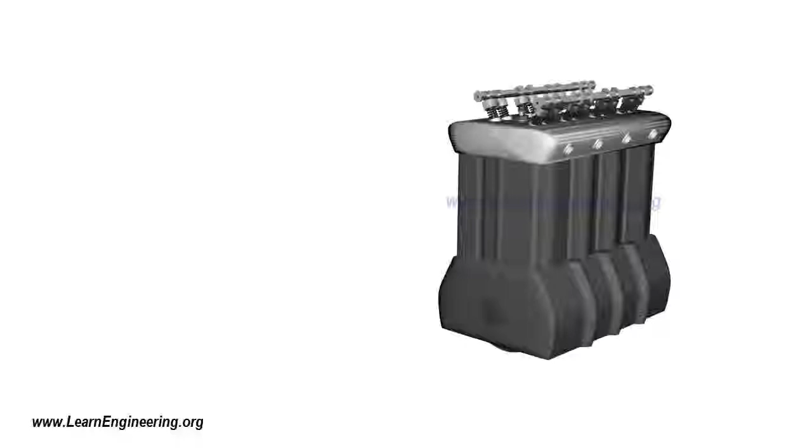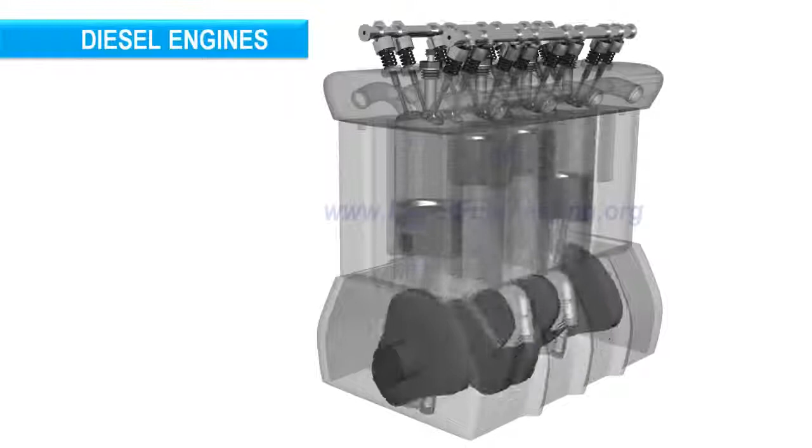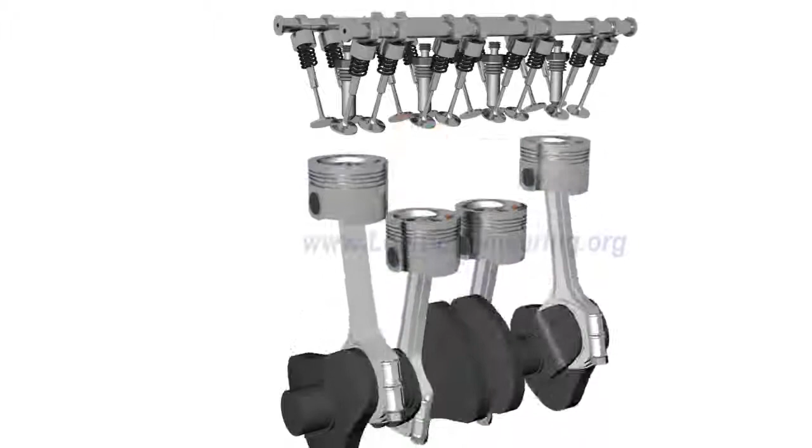An internal combustion engine transforms the chemical energy in fuel to mechanical energy. Diesel engines, which have been serving mankind for over a century, are the most versatile and economical IC engines. To release the chemical energy in diesel effectively, an atomized form of the fuel is made to contact with high temperature and high pressure air. This energy is effectively transferred as mechanical rotational energy.

So the operation of a diesel engine is all about producing high temperature and high pressure air continuously. We will see how this is achieved in this video.

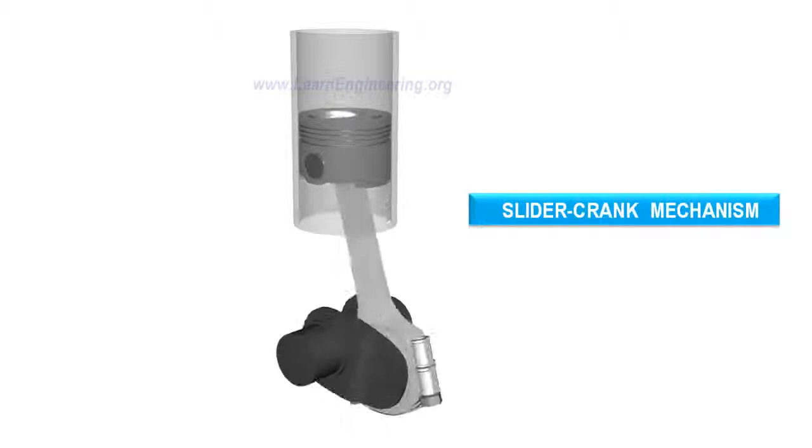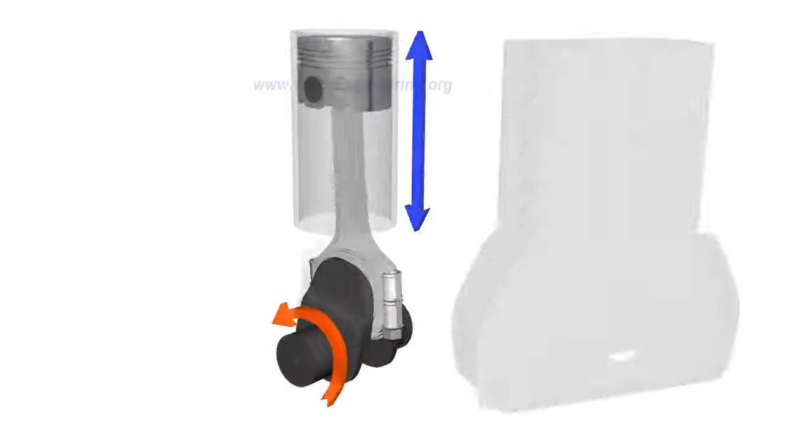Piston, connecting rod, crank, and cylinder form a mechanism called slider crank mechanism. Here, the linear motion of the piston is transformed to a rotary motion at the crank. In an IC engine, this mechanism is properly supported in an engine block.

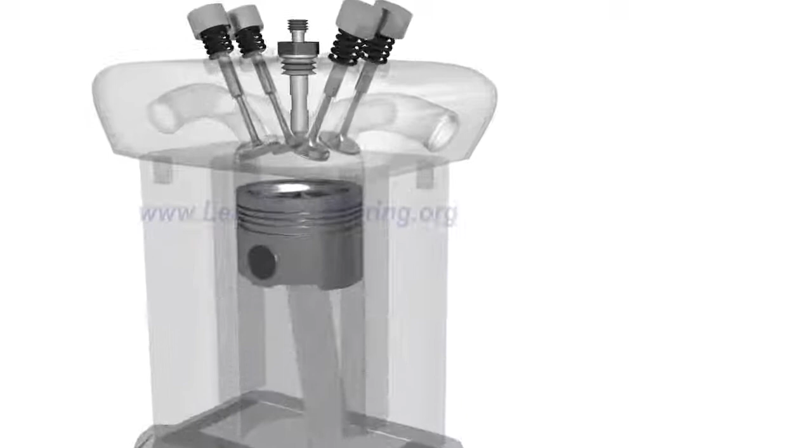Cylinder head, valves, and fuel injector are fitted above the engine block. When the piston moves downwards, inlet valves open and fresh air from outside is sucked in, or, in other words, the engine breathes.

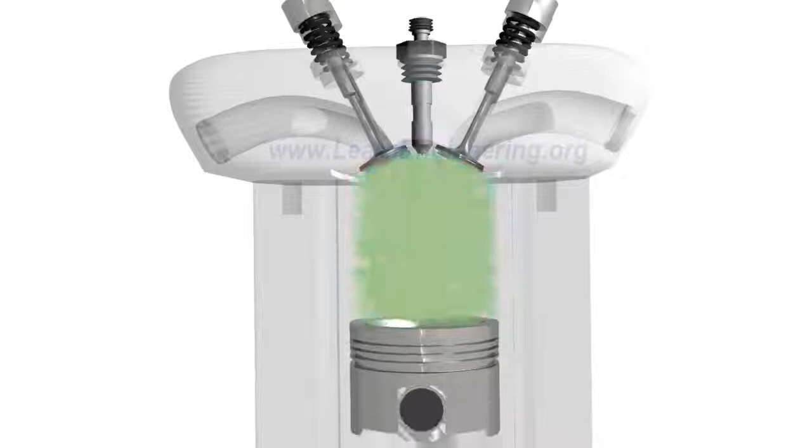During the return stroke, inlet and exhaust valves are closed, and the air inside the cylinder gets compressed. During the compression stroke, the piston does work on the air, so the temperature and pressure of the air will rise to a level which is higher than the self-ignition value of the diesel.

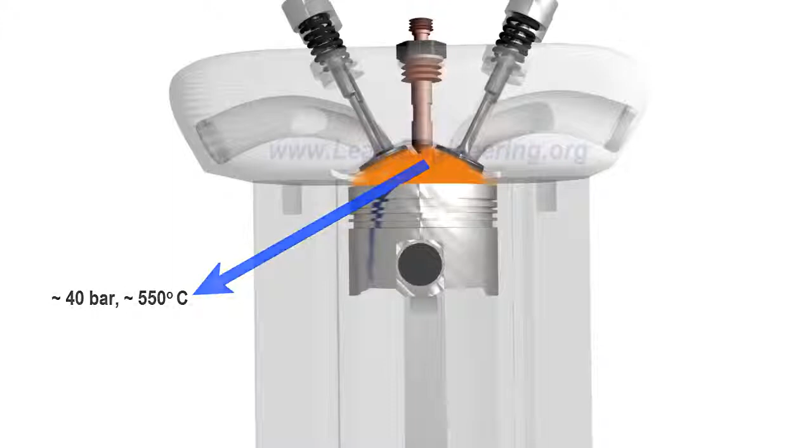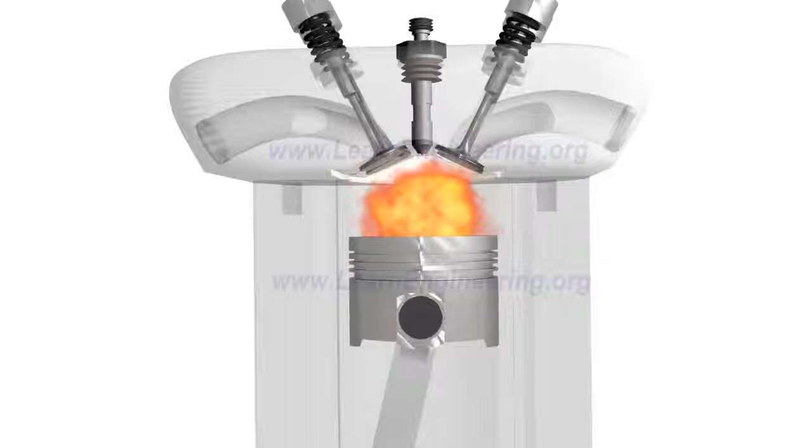An atomized form of diesel is injected into this compressed air. The fuel gets evaporated and undergoes an uncontrolled spontaneous explosion. As a result, the pressure and temperature rise to high-level values.

The high-energy fluid pushes the piston downwards. The hot air does work on the piston, and energy in the fluid is converted to the mechanical energy of the piston. This is the only stroke where the piston absorbs power from the fluid.

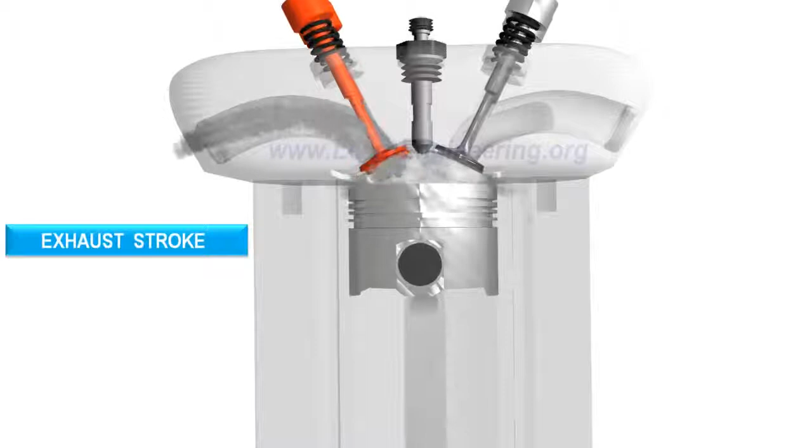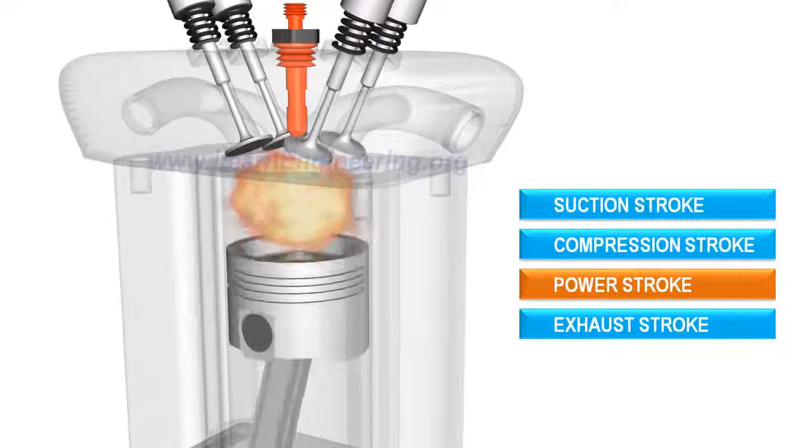Due to inertia of the system, the piston moves upwards again. This time, the exhaust valves open and the exhaust is rejected. Again, the suction stroke happens. This cycle, which has a total of 4 strokes, is repeated over and over for continuous power production.

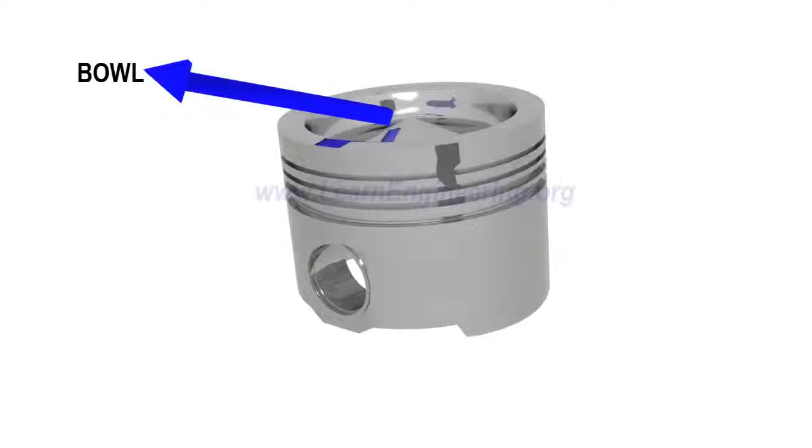You may have noticed that a bowl is provided on top of the diesel engine piston. During the compression stroke, this bowl helps produce air that is rapidly swirling. Thus, the injected fuel gets mixed with the air effectively.

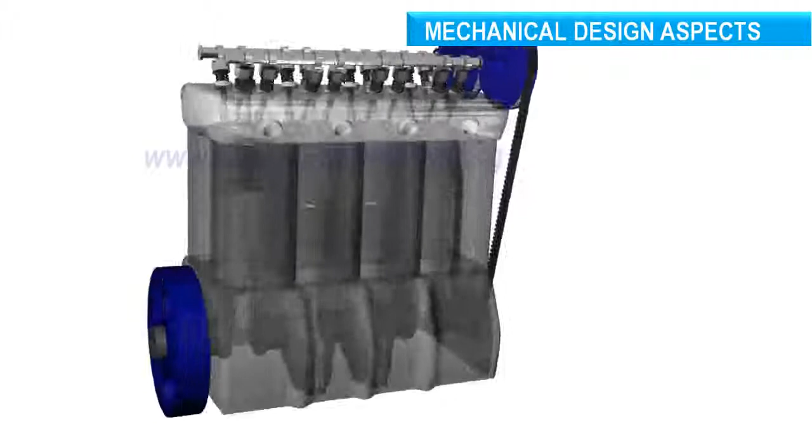The mechanical design of IC engines, particularly that of diesel engines, is a challenging and interesting task. Since the combustion process in diesel engines is never uniform and smooth, they are prone to more vibration and noise compared to petrol engines. Thus, diesel engines require a rugged structural design.

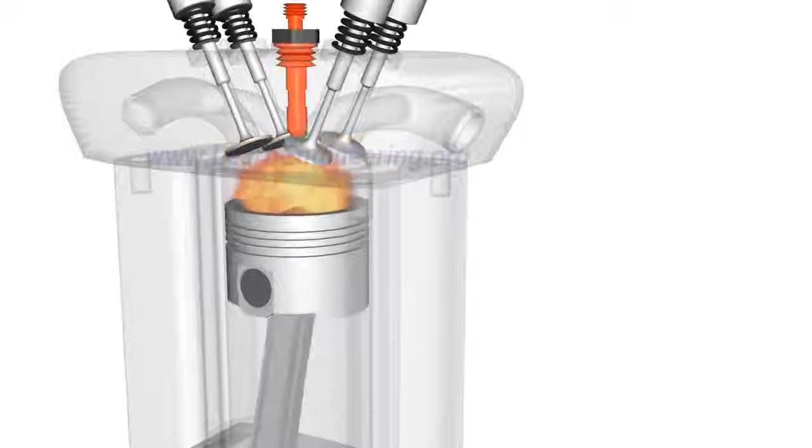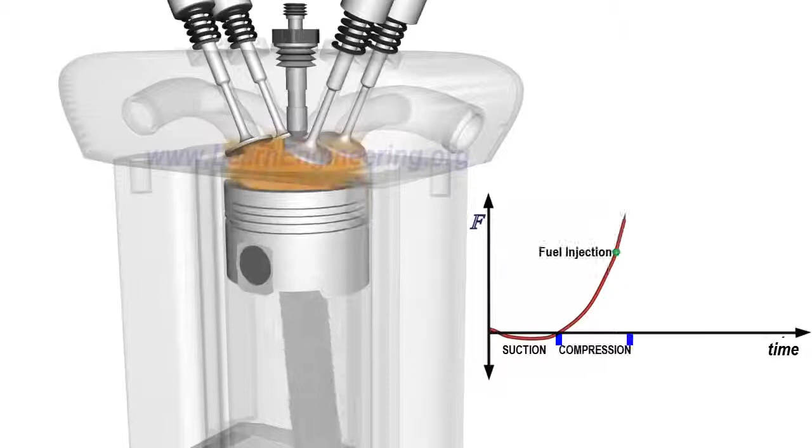Out of the 4 strokes, it is only during the power stroke that a tremendous amount of force is exerted on the piston. So a single-cylinder engine will always have high force non-uniformity as shown. Similarly, the output power will also have a fluctuating nature.

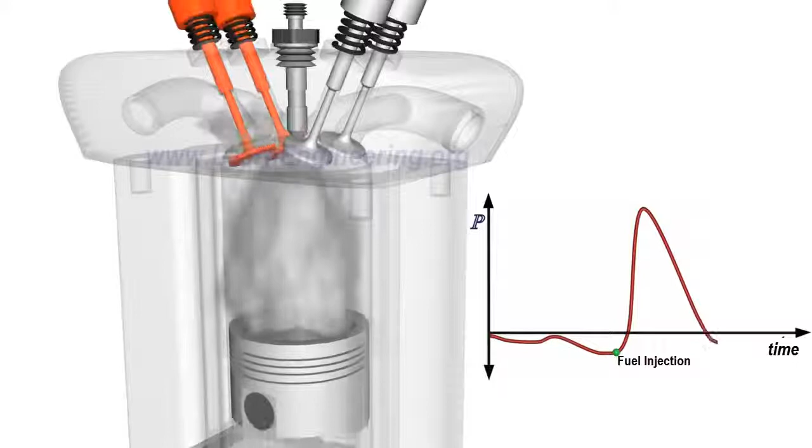But with more number of cylinders, one can overcome these problems. Consider this 4-cylinder engine. Here, 4 different strokes can occur at a time. So the power stroke is always present in the engine. As a result, a 4-cylinder engine will have better force and power uniformity.

In short, the more cylinders an engine has, the smoother it will operate. A 4-cylinder engine generally operates on the following firing order.

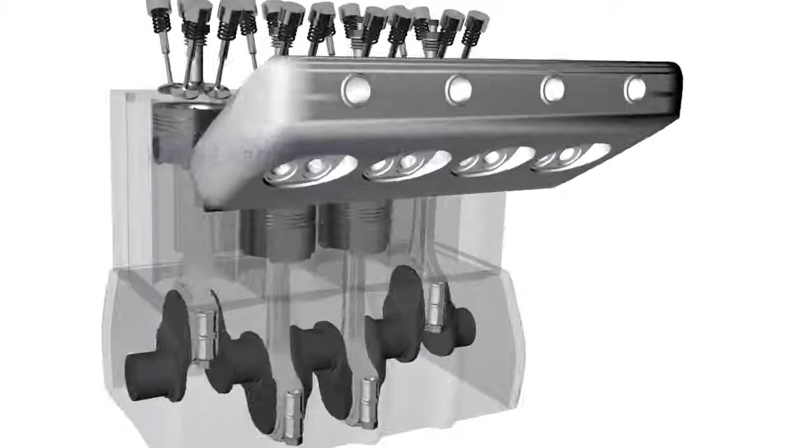A heavy flywheel which acts like a power reservoir further helps in smoothing out non-uniformity of power. A huge unbalanced force arises in the form of dynamic unbalance due to the excessive mass at the connecting rod side. This is negated by providing counterweights on the crank side.

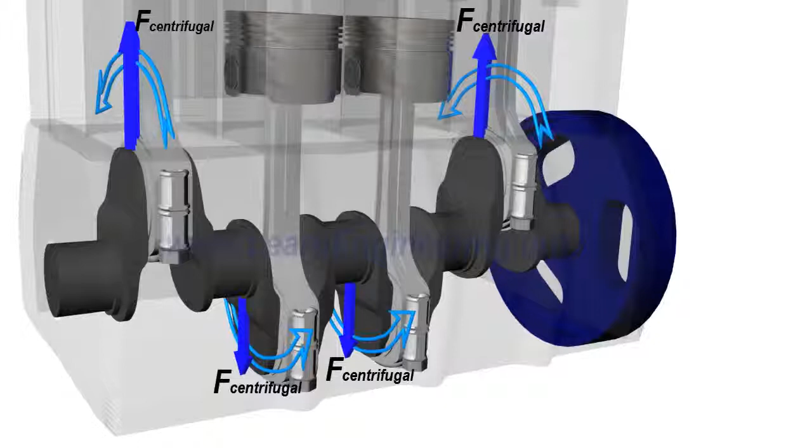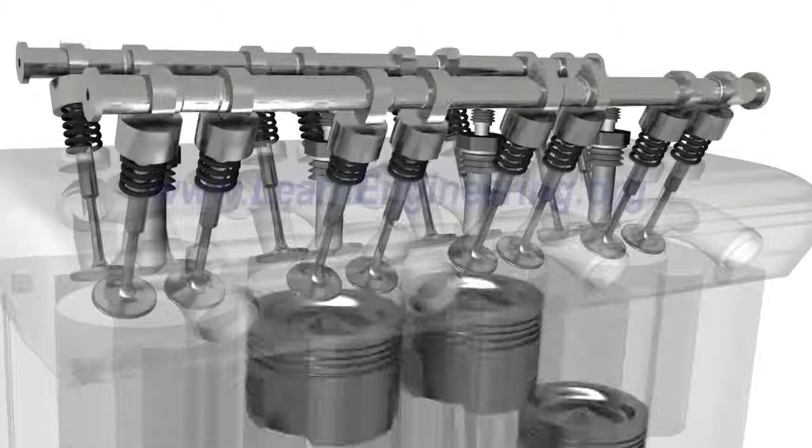Opening and closing of valves are accurately controlled by a pair of camshafts. Camshafts derive motion from the engine. It is clear that the camshafts need to rotate at half the speed of crankshaft.